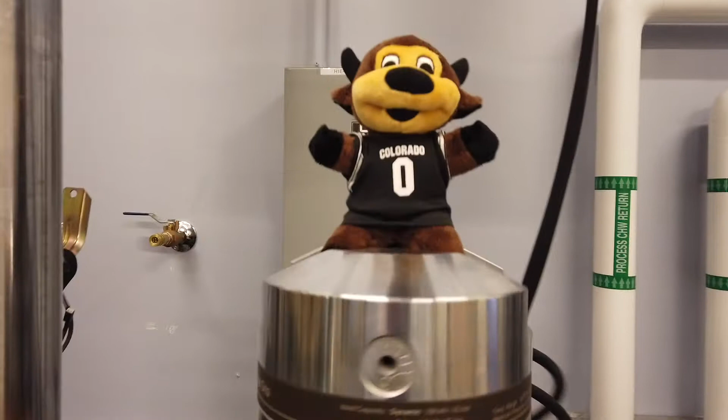Hi, I'm Andy Kane, and I'm going to overview the MTS Axial 809 Axial Torsion machine that we will be using for the torsion lab. Quick overview of all the equipment that we will be using. This is the machine itself, our top and bottom grips. This will be our axial torsional extensometer, and this is a hydraulic pump unit that drives the movement of this machine. And then lastly, we have our software that controls it.

Now that the machine is running and you have a good overview of how that works, let's look at the software. In the multi-purpose Elite software, we have it opened up. First thing we're going to need to do is open the test for our specific sample. We have two samples. We have the open thin wall, which is this with a slot cut through it, and then we have the closed thin wall, which is essentially the same thing, but there's no slot. Both of those tests are different because the open thin wall with the slot cannot handle near as much force or torque, so it's important for you to open the right test.

So first thing we're going to do is open the test. We'll go desktop, and we'll go ASEN 3112, Lab 1 Torsion, and then pick your test here depending on which sample you're using. We can start with the 20-inch pound and return, which is for the slotted sample. As you can see, the 400-inch pound and return is for the closed sample. As you can see, there's a much larger difference in the torque applied.

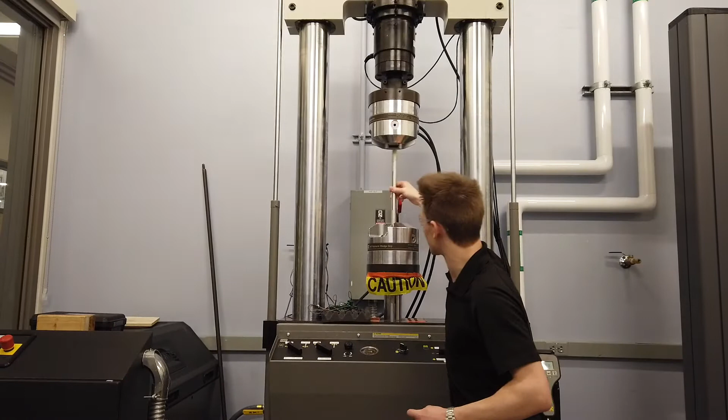For the specimen installation, I have grabbed the correct specimen. For our case, we're using the slotted tube. As you can see, there's clearly a slot down the specimen. The first thing we're going to have to do is unlock the interlock so that we can control the crosshead in a position that this can fit. As you can see, it's way too low. So we unlock the crosshead and we move the crosshead up. Now that there is enough room for me to come down and put it in here, we are ready to install it and then close the bottom grip.

We have Sharpie. It's probably hard to tell because it's fairly worn, but there's a Sharpie line that tells us how far we need to insert the specimen. Things to note is that this part of the grip will lower down, and the grip teeth itself will stay at the same height. So as long as you line it up and then hold it steady, it will align itself properly.

So now we're going to close the bottom grip, and it's really important for you to have a couple things. Have your safety goggles on. You're going to want to have those on at all times. And then also be aware of any fingers in the way. You do not want to pinch yourself because the hydraulics does not care what's in the way. It's going to close the grips. So you're in a good position. You want the slot facing out. That way our extensometer can sit right, and then close the bottom grip.

Now the bottom grip is installed. The next step, and you always want to follow your instructions. You don't need to see it directly, but now we're going to have to zero our signal. So if you want to pan over here, we want to zero the signal of torsional torque and axial force, which are these here. So all you do is right click and zero signal.

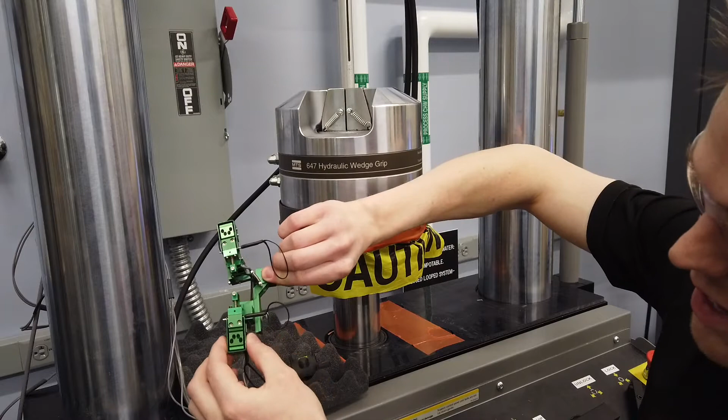Here is our axial torsional extensometer. The first thing you're going to want to do is always handle it via grip points. We have 5 grip points. We've got these 2 here, this center one, and then 2 here. Really, I just kind of use these 2 and the center one. You'll want to look at this little outer shell. If it has this outer kind of protective shell, then that is a good grip point.

A zero pin had just fallen out, but it is important for these to stay in. Essentially, the zero pins are there to hold the sensor in place at the position of zero deflection. And so the first pin is going to have to be removed. This is our center zero pin. I'd recommend having 2 people, have one person flexing it slightly while the other person twists and pulls to remove it. Now that the zero pin is out, we are prepared to install it on the specimen.

This again is a 2-person job, so I will have Will come around and hold the guiding spacer. One thing to note is on this back side you can see this little corner. We've designed this spacer to have a notch out, and so you'll want to use that to align it. What this does is center the extensometer right on the center portion of the specimen. You're going to want to be right at the center because it's really important to avoid any kind of slipping for the extensometer.

Now that the extensometer is installed, you'll want to look at it and make sure that it is lined up with the specimen. We've done this many times, so it's really easy for us, but this is something that you might have to do a couple times to get the feel for it. Now that this is installed, we need to go back to the software and zero the extensometer signal. This is the same as the torsional torque and axial force. We're going to have to do this twice, so I'll show you the second time we do it.

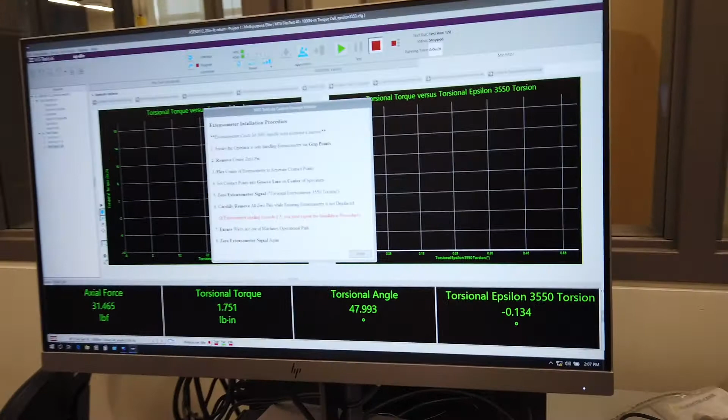and see that the extensometer is below our threshold, so we're going to now zero the signal by right-clicking and clicking zero signal. And now we're at 0.

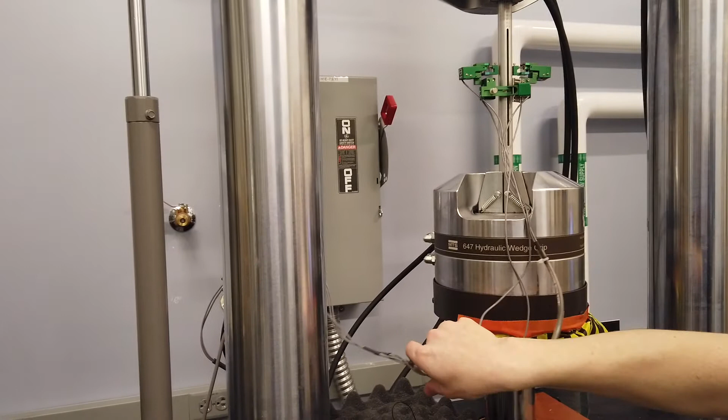One last thing back over at the machine was to check these wires to make sure that they are not in the way. We have them hanging up in the back. Make sure there's enough slack in the wires such that when the machine starts to move, they're not going to get caught on anything and rip the extensometer off.

Then also take your foam and set it somewhere else. I will set it over here on top of our hydraulic pump unit. Now the extensometer is ready to go, and we will move on to the next step in the process.

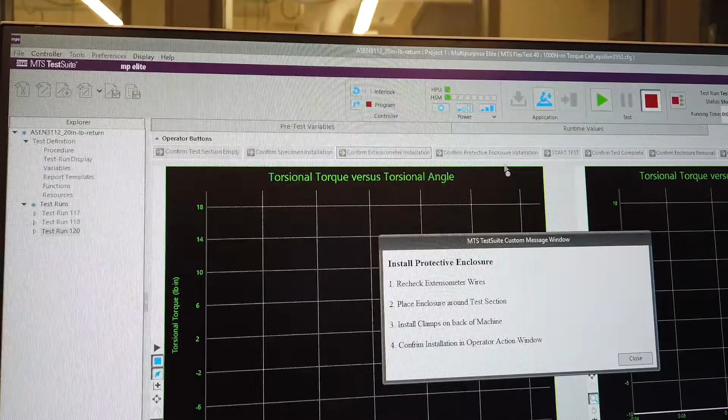Now that the extensometer has been installed, we will close this window and then confirm it on our operator buttons. Confirm, and now we need to install the protective enclosure.

So after looking at these steps, the first thing we need to do is take our protective enclosure, which is this right here, and then set it up on top. It's really important that you watch those wires and make sure you don't pinch anything. I'm going to slide this back far enough that the back wooden plates are over it, but not too far back that this front plexiglass face does not come into contact with the grips.

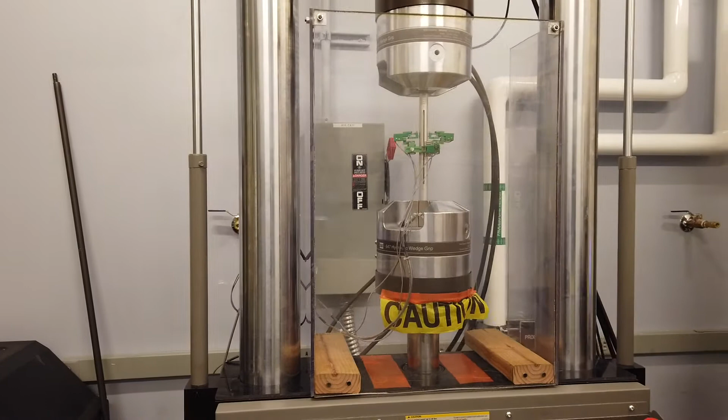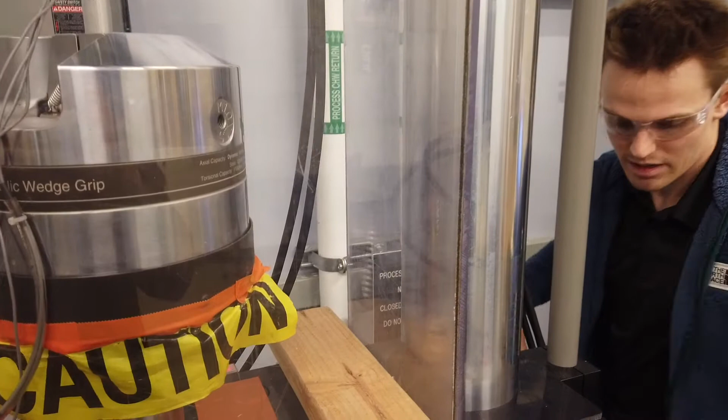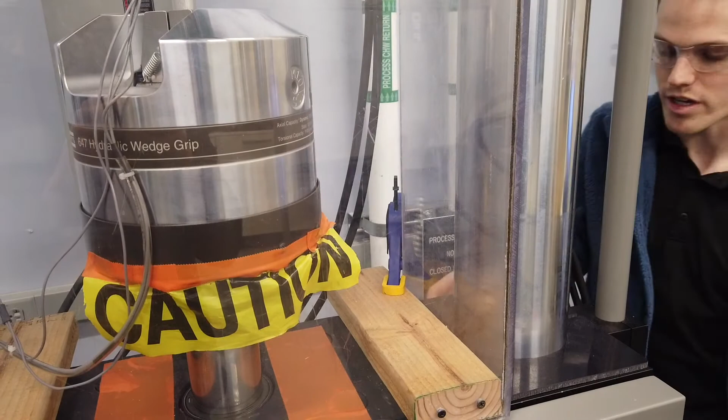On the side we have our grips, and we'll use that to clip in the protective enclosure. When you're doing this, make sure that you're not grabbing anything on the bottom of the machine, and you're hooking to just this metal piece right here, because you don't want to cut off any valves or anything. And also watch your feet as you're coming through.

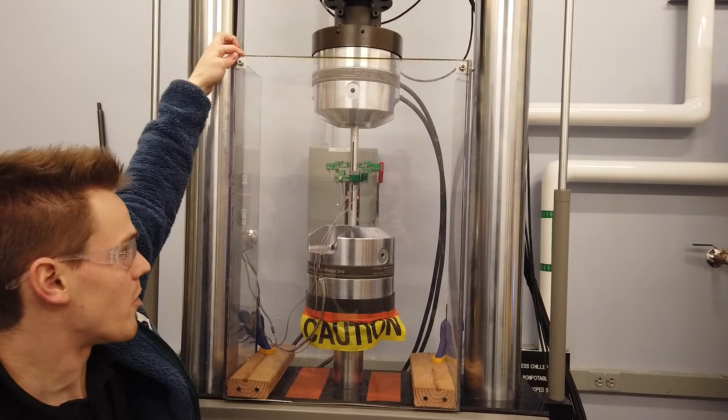Now that our protective enclosure is installed, we've created a safer test environment. Just in case anything does go wrong, you don't have to worry about anything flying out and hitting you. Same thing with the safety glasses. Always want to be safe, especially with a machine of this power.

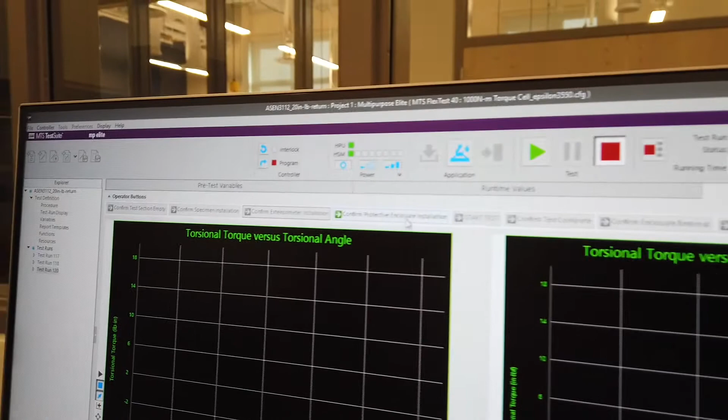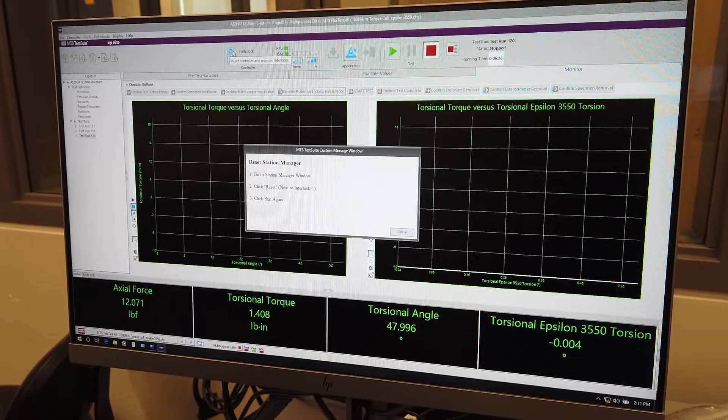So now that this has been installed, we will check that we have confirmed all of these. We'll close the window and then confirm protective enclosure installation. Now, this box pops up. This is an important box because during the installation process, we unlocked and locked the interlock, which has an effect on the computer. So what we need to do is go up here and then click this Reset Controller and Program Interlocks button.

We click this, and that resets it, and then we can click Run again. Now we are ready to start the test, and we click Start Test.

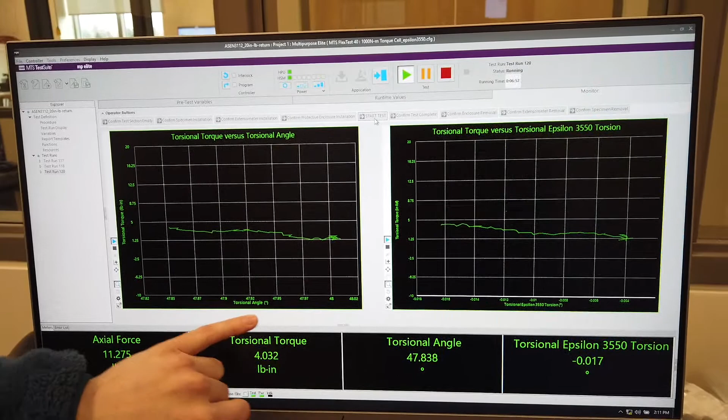As the test moves, you will notice our plot for both the torsional torque and torsional angle. Torsional torque is on the y-axis of both of these plots. This is our torsional angle, which is the angle of the machine grips itself. And then this torsional epsilon, this is our extensometer's data.

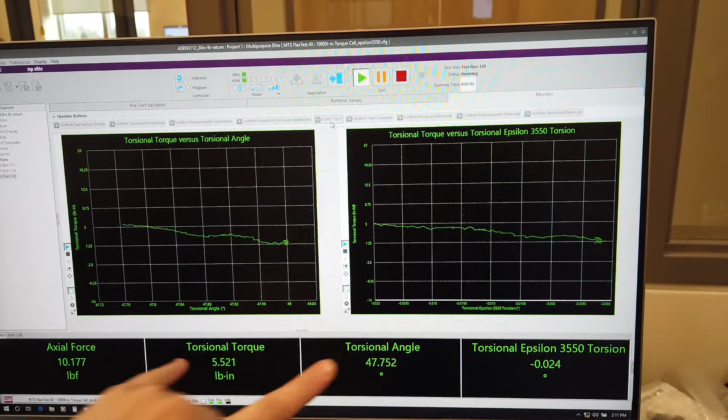They will look similar, but it's very important. They will be different, and you'll be able to recognize that difference when analyzing the data. This is going to give you much more accurate results. Throughout the test, you will watch it linearly increase.

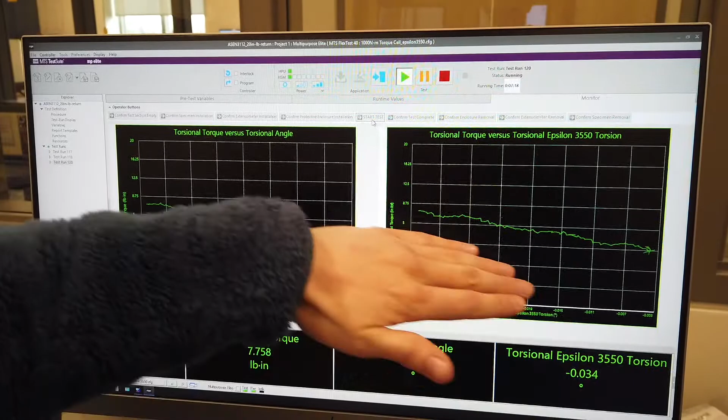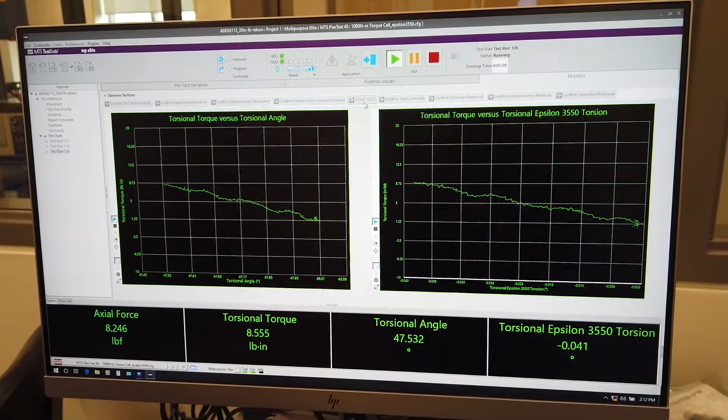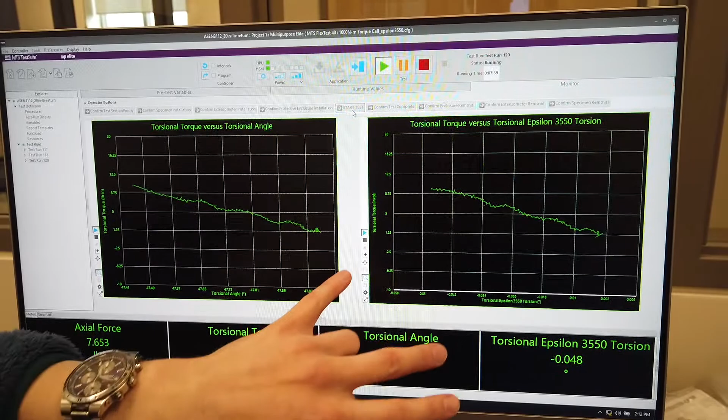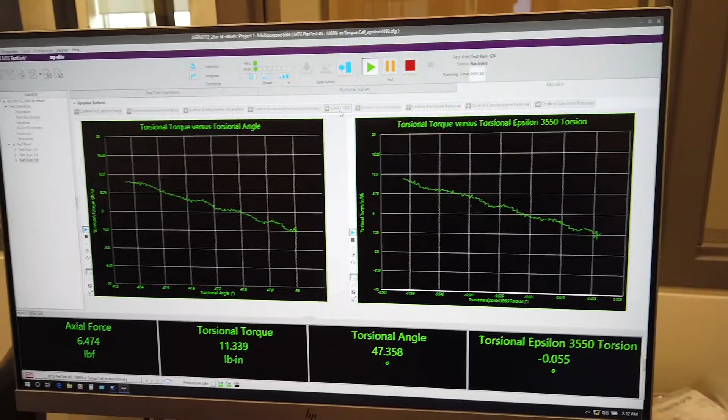I will make note that the standard stress and strain curve, which this is somewhat mimicking, is linear in the opposite direction. The reason why it's like this is because of the way we've plotted it and the way the software doesn't allow us to create variables to go negative. We're rotating in the negative direction, which causes it to go the opposite way, which is kind of annoying, but it is still linear, and you can watch as the data comes in throughout the test.

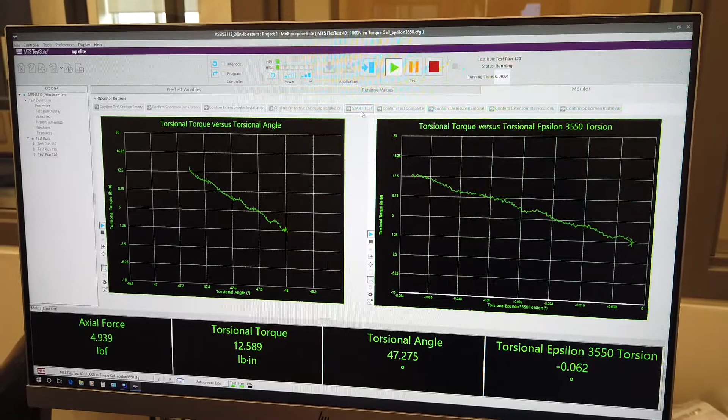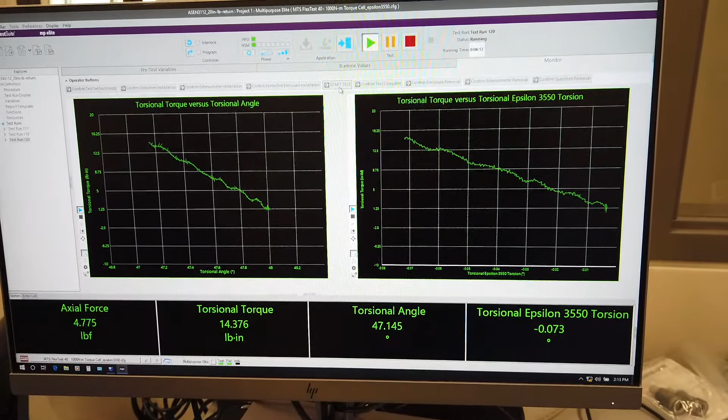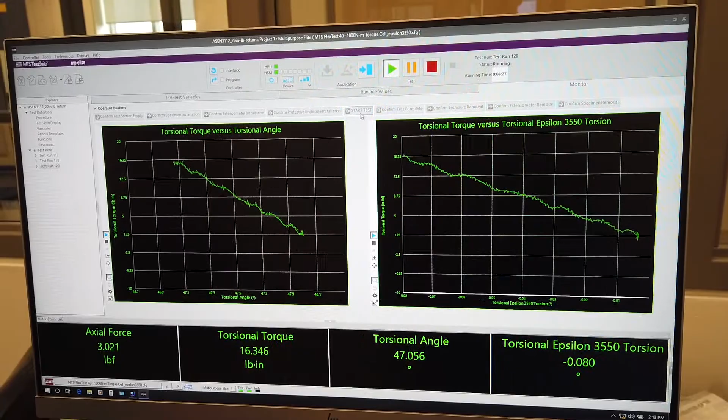For this test, we are going to be going to 20 inch-pounds and then returning. We're at about 13 right now, and it's going to work its way up to 20 and then step back down. This data is looking a little bit jumpy, but we'll want to look at the data at the end of the set and judge it towards the end. And if it jumps too much, if the teeth on the extensometer slip, then we might want to retest, depending on how much the data is affected.

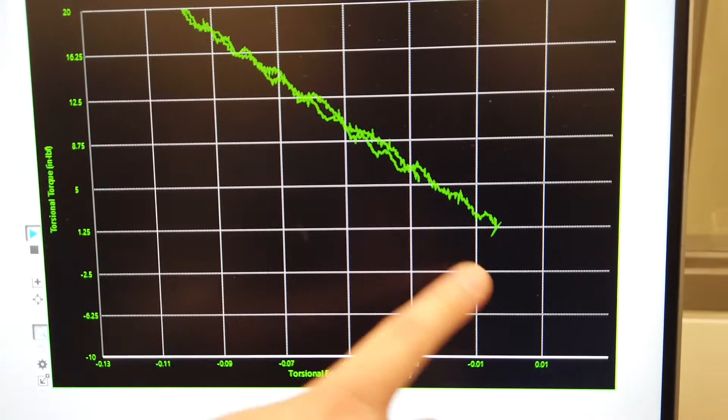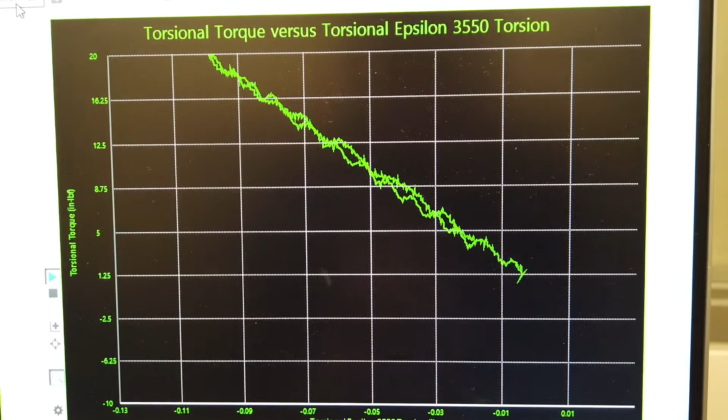Now that we're at the end of the test, we've brought the recording back. You can see this data is really jumpy. That's a pretty messy looking data set. So if we were to be analyzing this set, we would probably retest. But for demonstration purposes, we've done a good job of explaining how to install everything throughout this process.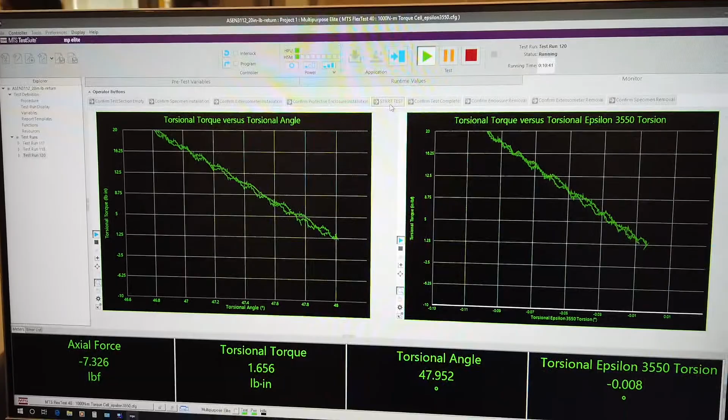The test takes about 7 to 10 minutes, depending on the sample, so we didn't need to show the whole process. But now that we're roughly back to zero, the machine's going to do a little working back and forth until this is zero, and then pop up with test complete. Now that it's complete, we will confirm it, close it, and then confirm test complete.

Once we do that, we will get another dialog box, and essentially we're going to step backwards from the installation process to now the removal process. And so on the machine, now we need to remove the protective enclosure, which is the same thing. We take our clamps, we remove them, we install the clamps back on the back of the machine,

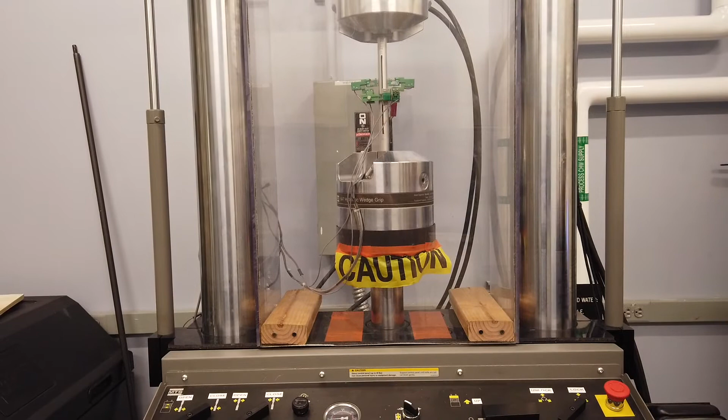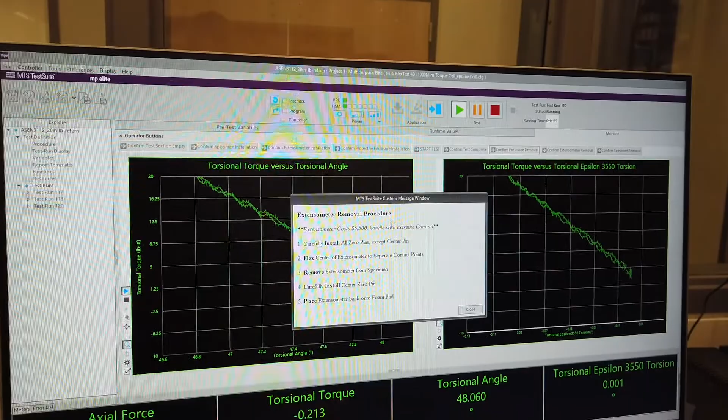and then set the protective enclosure down somewhere where it's not in the way. With just a few people in here it's right in front of the room, but when you have more people testing, we'll probably set that aside somewhere else. Now that the removal of the protective enclosure is done, we close and confirm, and now we do the extensometer removal. This again, expensive, be very careful.

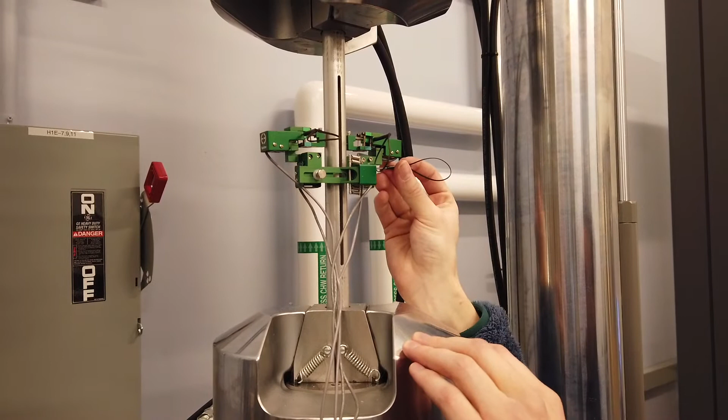We get our zero pins back. All the zero pins are the same, so you don't have to worry about knowing which one's which. You want to install the 4 zero pins on the sides first. And when you're doing this, make sure you're not forcing anything. There's no reason for any of these zero pins not to go in fairly easily. So if you're having an issue with that, talk with the LA and they will get you figured out.

Right in there, I can't see it. There we go. Now that all the zero pins have been installed, you want to flex the extensometer to remove it. Now you want to reinstall the final zero pin, which is kind of tricky. I can do this with one person, but I would recommend having somebody else pushing it while another person flexes it.

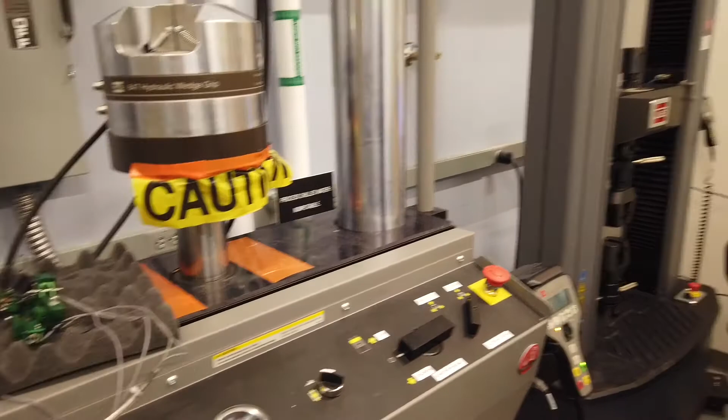Now that all the zero pins have been installed, you want to set the extensometer back on the foam pad, and we like to set it on the foam on the side such that if we lose power and this drops down, it's not going to come down on the extensometer. Set it closer to the support column rather than the actuating grips. Now that our extensometer has been removed, we can return to the software and close and confirm. And now we need to remove the specimen.

First thing we're going to need to do is unlock the interlock and then open the top grip. When you're doing this, you might hear a little click. The specimen itself gets seated pretty solid onto the teeth, and so it doesn't always come out right away. I didn't hear a click, which means that it's still on there pretty well. And so what we do is we take this mallet and lightly tap. You don't need to hit it very hard, just lightly tap it and make sure that it has been removed.

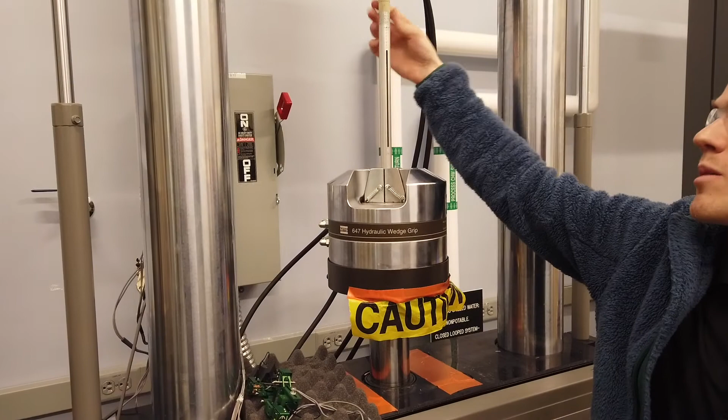And that's important because the next step is to raise the crosshead, and if it's stuck, then it will grab these teeth and then pull them down, which is really bad for the machine. So we'll watch out for that, and I'll make sure as I'm doing it to release if it does. But we've got the removal, no stuck grips, so we're in a good position. Next we need to open the bottom grip. This is much easier, just move out and then take the specimen out.

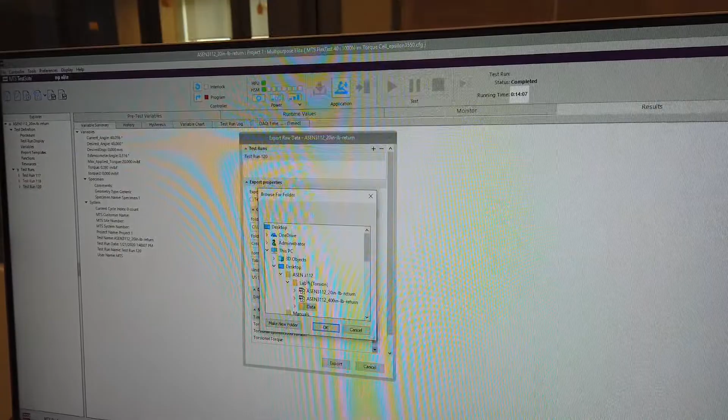So that is your full test procedure. I guess the last thing you're going to need to do is come back over here and close and confirm specimen removal, which completes the test. The last thing you're going to need to do is save your data by going into your test run. We were test 120, and so we need to export raw data and then save it in a location that you want by looking at the file path. We have a data folder, so you'll want to put it in the data folder. It'll automatically be in that file path.

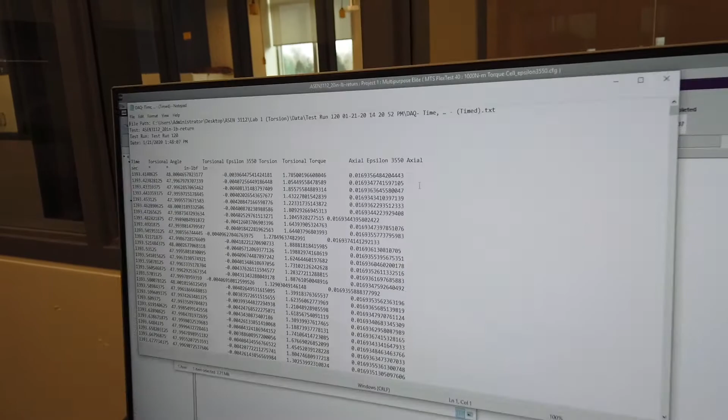Remember your test run and then click export, and then always check your data right away to make sure that it actually saved everything properly. So we'll just open that up really fast. Test 120, and here's all of our data. So that was the full slotted test.

You're going to run 2 tests. We did the slotted test, and then here's our closed thin wall. Both of the procedures are the same. The main difference is the actual software itself. You need to open up 400 inch-pound return for that.